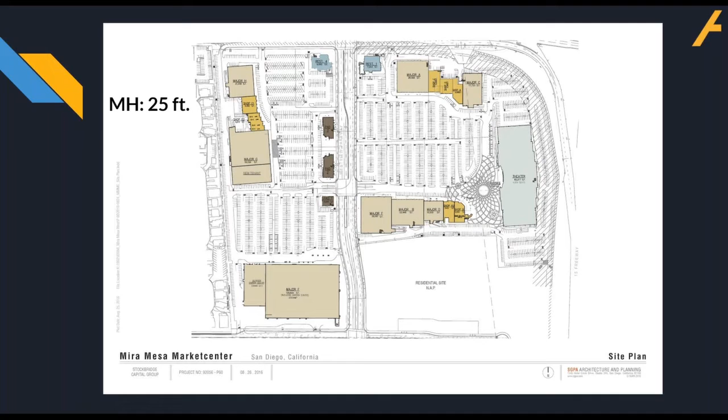So Sony took this information into account, and he came up with a solution that exceeded the customer's expectations. And yes, he can do that for you too. So the fixture that was chosen was our new Hyper Series area light. I will now let Sony explain a little bit more in detail why he recommended this particular fixture.

Thank you, George. So now that we have selected the Hyper Series area light, since this is a parking lot, the real question now is, how do you know which wattage to choose? And there are two criteria we take into account. First is the existing wattage, because that will be a baseline to start with. Second is the recommended light levels for the application. In this case, a parking lot. So between 0.2 to 2 foot candle average and 0.2 minimum, because that's the recommended level for security purposes.

The recommended light levels for the application is more important later on, which we will discuss further, as it would help us adjust accordingly to reach the levels that the application calls for. Also, as mentioned, it is good to know the existing arrangement of the lights because it will help us in determining the best proposed arrangement.

Now, what do we mean by that? For example, because of our high lumen efficient lights, which is usually 165 lumens per watt, we could perhaps use 2 heads instead of the existing 4 heads per pole that the customer has on site, and actually provide the same or even better coverage.

And we have to also select the right optics. For example, in a wider space in the parking lot, we will normally use a type 3 distribution. In a narrow space, we'll use a type 4. And for a single pole in the middle of a parking lot, it is usually a type 5 that we use.

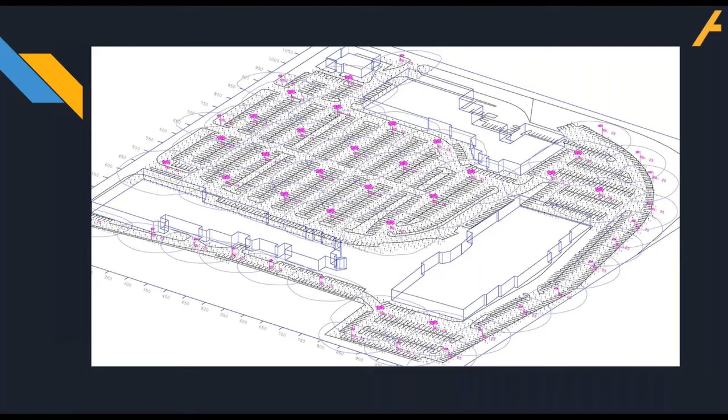And this is where the real magic happens in our photometric study, because from this initial solution, we can work on how we can further improve upon it. We have many different options to do this, such as tilting the fixtures, changing the optics, or changing the wattage to find the best solution. We also work with the customer during this process, if need be, to find the best solution for them. So in this case, we ended up with a 150 watt Hyper Series area light as the best solution at a 1-for-1 replacement.

So from those calculations, the software is able to render and provide a visual model of the layout with the light. So all that modeling that we did earlier, such as adding the buildings and drawing out the parking spaces, was crucial because it gives perspective to these 3D renderings, and it allows the end user to better understand where the poles are located and what kind of light patterns they'll be getting around the parking lot.

The software can also produce a rendered heat map, which allows the customer to visualize the light levels as it pertains to the vertical surfaces and buildings on the project. And that is another advantage of LED fixtures as opposed to traditional lighting, is that we can direct LED light, meaning we can reduce light waste and glare by directing it. In this case, as George mentioned, shoppers were complaining about some glare coming out of the shops, so we directed the fixtures down to reduce the glare.

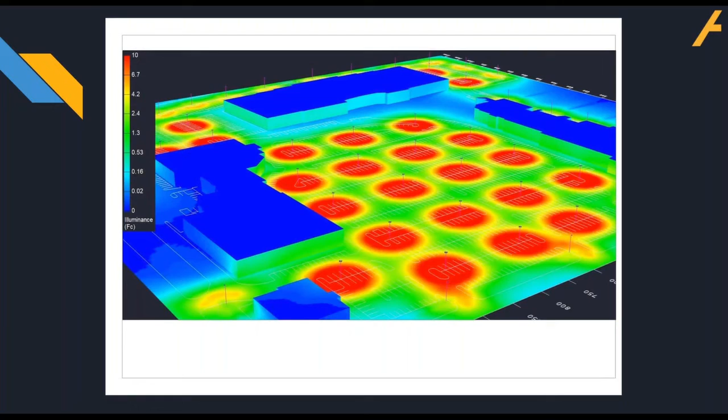So once everything is done, we can produce the finalized photometric report with average foot candle readings. As you can see, the average foot candle reading on this parking lot is approximately 4 foot candles. We're also able to provide the maximum and minimum foot candle readings and uniformity ratio. Those maximum readings are usually directly underneath the pole, and the minimum 0.2 foot candles met security recommended levels. Now there are a total of 122 lights, and as you can see on the top left here, there are 22 single poles and 25 poles with 4 heads on them.

So anyways, although this is higher than the average foot candle for a parking lot, the customer was extremely satisfied with it. However, they still wanted a live demonstration to support our photometric study, so we were able to send them free samples of both our 150 watt and 120 watt light to test, and they loved it. They actually decided that the 150 watt option that we proposed in the photometric study was indeed the better solution for them. And after all, they are still saving 250 watts of energy per light, since this ended up being a 1-for-1 replacement.

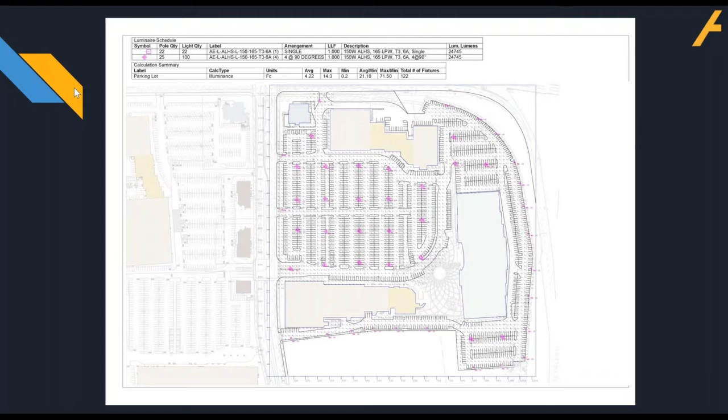Next, we'll explain how to do an interior photometric study. But first, what constitutes an interior photometric study as opposed to an exterior one? To us, anything with a roof is considered interior. Even a barn that is open air is considered interior, as long as it has a roof, because we can remove the walls on AGI32. And you might be wondering, can we run a photometric study with interior and exterior applications in one? And the answer is, of course we can. We've done it several times for our customers, as long as we were provided all the necessary information. And as mentioned before, the more information that we are provided, the more accurate our layout can be.

So anyways, like an exterior photometric study, a CAD file is best because it gives us all the structural dimensions inside the room and any stationary objects that we have to take into account. And if that is not available, either a PDF blueprint of the room or even just a simple drawing is fine, as long as it has the room dimensions such as the length, width, and height, because we can then draw it out ourselves on AGI32.

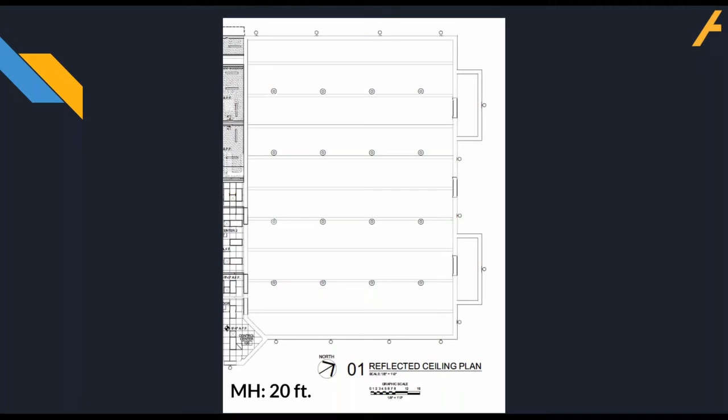In this case, the recommended fixture was our UFO high bay, which has been a go-to for many of our customers. I will now hand it back to Sony so he can explain how he came to the applicable solution for this project.

Thanks, George. So in this case, it was pretty straightforward because the customer requested a 100-watt UFO waterproof high bay. However, as mentioned, we have to also take into account the application when specifying a wattage if it's not specified. For example, if the mounting height is low, such as in a grocery store, we try not to have the wattage too high to reduce the glare for shoppers. So instead, we will recommend the customer use a lower wattage but have more fixtures spread around, as opposed to having fewer fixtures but higher wattage.

So same with this project. We have to keep in mind that it is a basketball court, because even just for a basketball court, there are many recommended light levels. And as George mentioned, different levels of play require different light level standards, such as NCAA or NBA and television broadcasts. And most of our interior photometric studies involve our high bay UFO, which comes with a default lumen package of 130 lumens per watt, but we also offer 165 and 185 lumens per watt options as well.

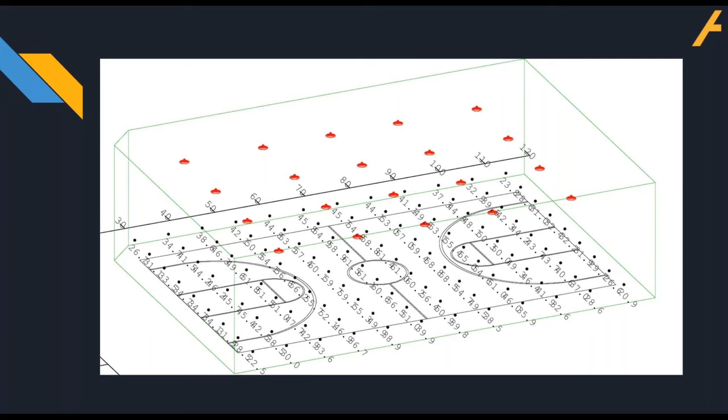So now that we have all the information, we're able to build the basketball court by drawing out the court and the room based on the dimensions provided. Although we proposed a 1-for-1 replacement at first with 16 fixtures, the customer actually wanted more light after seeing the initial report. So we offered them more solutions and photometric reports. These solutions include increasing the lumen package with the same number of fixtures, or keeping the fixture the same but increasing the number of fixtures. And eventually, they preferred the option with another row of lights for a total of 20 fixtures.

Now, once again, the software renders this 3D image here, which helps the customer visualize how the light distribution will look in the gym and see if the dark spaces they had issues with before are now addressed. The rendered heat map produced by the software also helps the customer visualize the light being washed on the walls inside the basketball court.

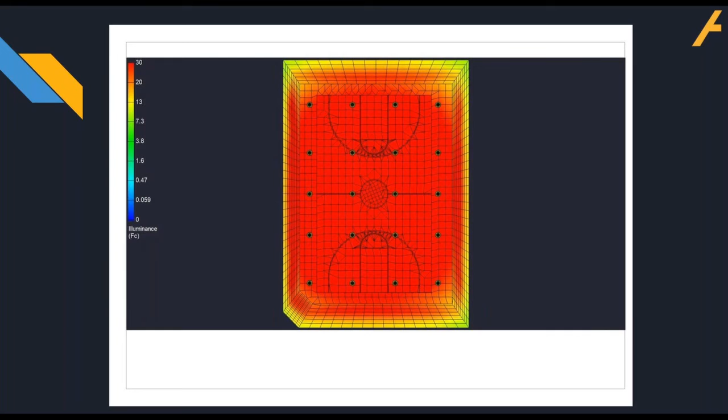And finally, we're able to produce the completed photometric report. In this case, we met the foot candle levels for recreational use of approximately 30 to 50 foot candles. Our calculations showed an average of 45 foot candles by using 20 fixtures, which the customer was satisfied with because it was the best solution in terms of both light performance and cost for them.

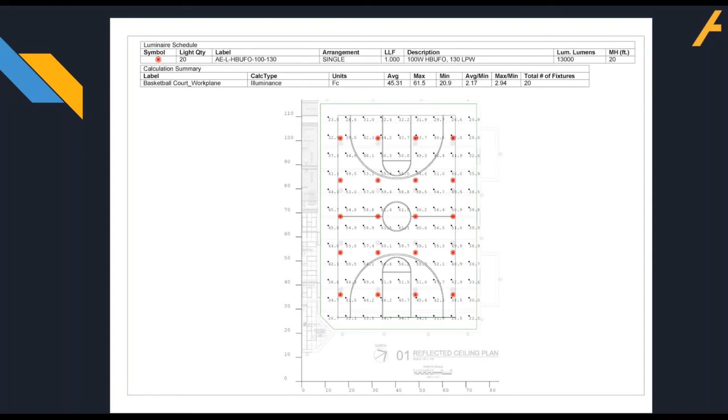So ultimately, what are the benefits to a photometric study? First and foremost, it allows the customer to make a better informed decision on their lighting solution based on professional and technical recommendations that we provide as proven in the photometric studies, and especially for end users who are not familiar with the technical information regarding light levels. The photometric study gives them a visualization instead of just words and numbers that they otherwise will not understand.

And also, as demonstrated, we will go above and beyond for every single photometric you send to us. We will collaborate with the end user, with your permission, of course, and you, to best understand their needs and how they want to light up their application. We also turn it around in 48 to 72 hours to give time for the customer to review and provide feedback and any changes needed.

In addition, our high lumen efficient fixtures mean the results of our photometric studies are better than most in terms of light performance and energy savings. And our fixtures are also DLC premium, meaning they meet and exceed the rebate incentive dollars. So ultimately, high lumens per watt equals higher energy savings, which means dollars saved for the customer.